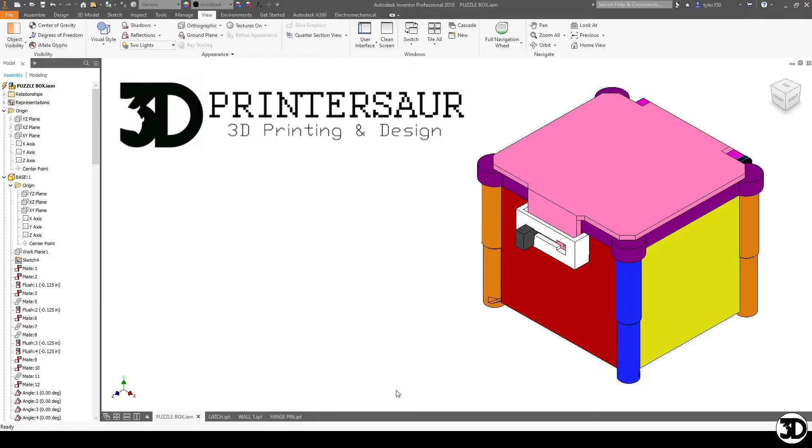In this video we're going to show a couple more pieces that are just to be polishing up here, and that'll be it for this. The next video will just show you how all the components are put together, and then we'll continue from there.

So in this portion here we did two different small changes. So one is with this latch portion. One, I actually did make it flush. I just changed my mind. And the other thing is that I changed it so that this piece here, the latch itself, will actually fit into the wall so that it actually holds on to something.

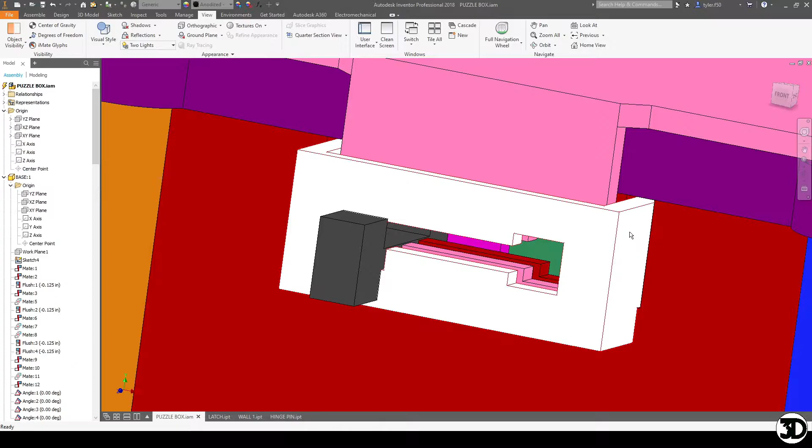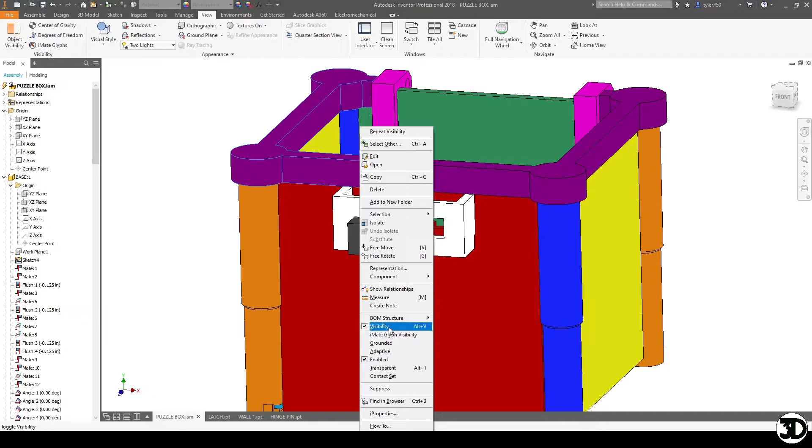The other thing I did is I added a pin, and this pin is going to allow for the hinge to actually move but be held in place. So let's take a look at the latch portion first on how it's designed and then kind of go from there. So first thing you'll notice with this is that the latch itself is actually just a simple groove that

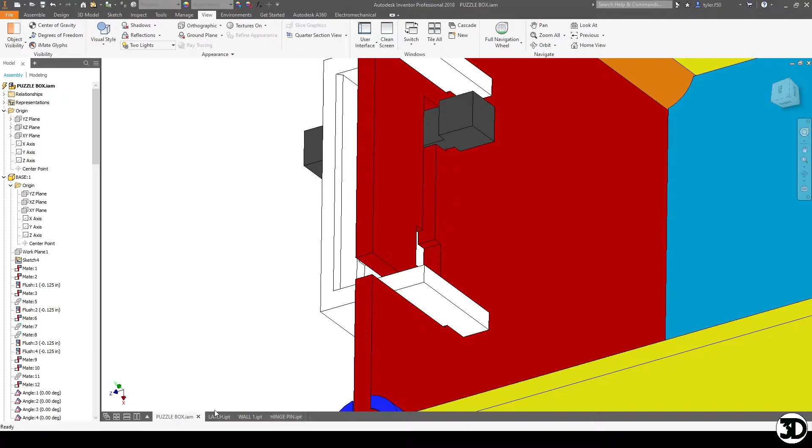is put in place. It slides down on the wall, and then essentially what happens is that lip that goes around will just cover it so it can't go up. And this is just done by some simple grooves on both the wall itself and the latch. So let's take a look at the latch and see how that is designed.

So here we have the latch, and you can see that essentially it has a little groove on it that's going to grab onto the wall, and essentially it is the same on both sides. So the way that that is designed is it essentially is 3/16 of a height up. It is 1/8 of an inch plus 1/64 of an inch wide, as the wall is 1/8 of an inch, just to give it a little bit extra gap.

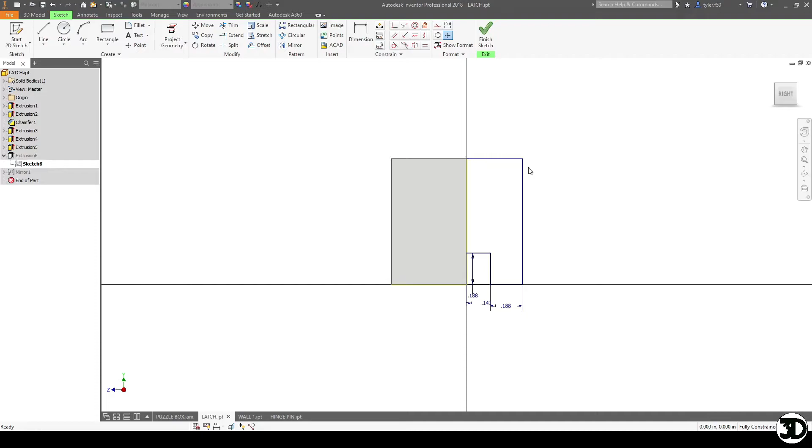And then it's also another 3/16 wide for the piece that needs material on the outside to create that groove. Everything else is the same dimensions height-wise and length-wise for the piece, for wall thickness, sorry. And then that's essentially how this is made, and then I just mirrored it to the other side to reduce the design time. So that's how this is designed here.

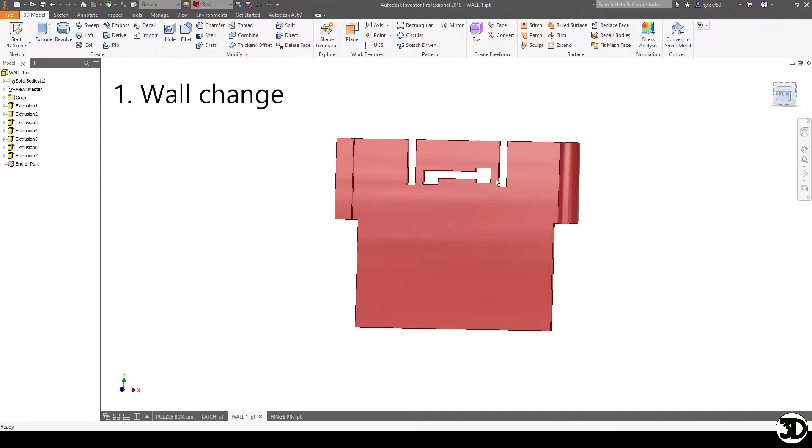And if we take a look at the wall real quick, you'll see that the wall itself just has a simple groove that goes straight down beside the locking components. And the way that this was figured out was essentially measuring from the bottom of this here to the top of the wall, and then subtracting 3/16.

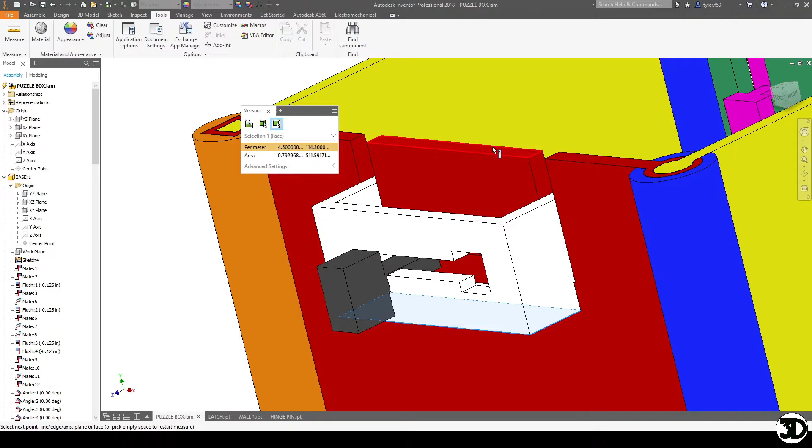So if I were to measure this here, you'd see that from here to here, it's 1 1/32, give or take. And if we look at this component here, it is 1 1/32 minus 3/16. And that allows us to have the component to match up there.

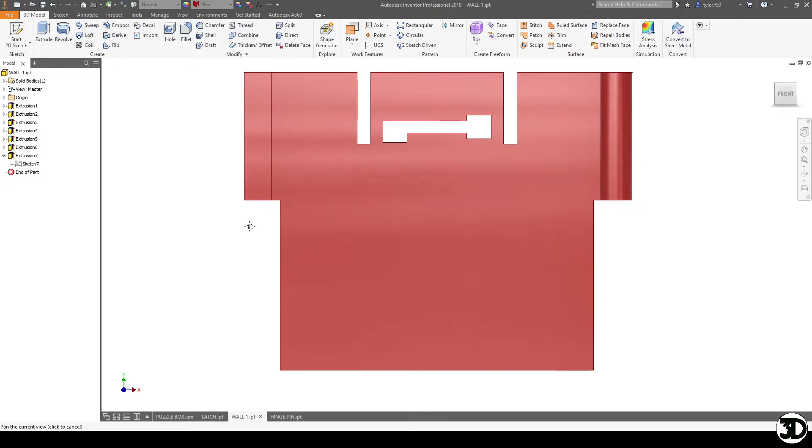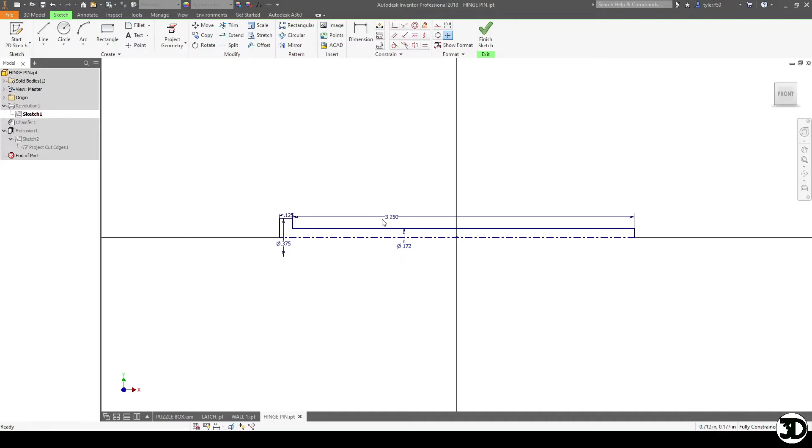Next, we're going to take a look at the hinge pin and see how that's designed. So here you can see the hinge pin itself. It's a very simple design. Essentially what I did is I measured the diameter, and it was 0.1875 or 3/16. I subtracted 1/64 to give a little bit of a gap, and then I made it 3 1/4 inch length, and that's because the distance from here to here is roughly 3 1/8 inches in length.

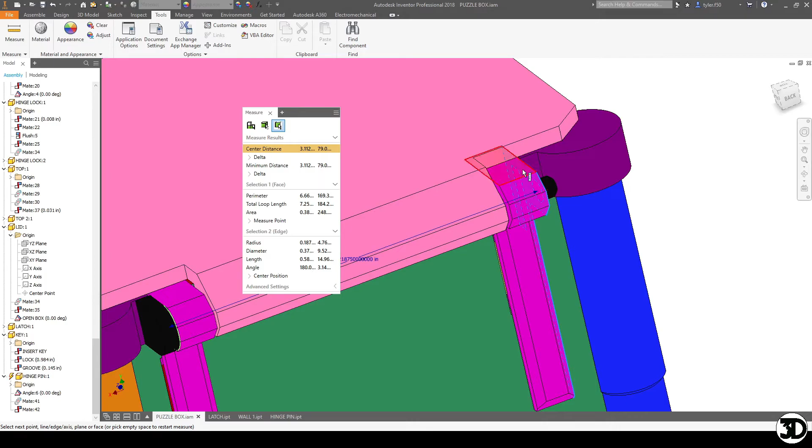So 3.112, I want to make sure the material would stick out or protrude enough from the side so that it still has contact with the pin in the hinge. Another reason why I made it extra long is if this shifted over at all, there's still enough material for it to be in full contact, so that when the hinge opens and closes the lid, you'll still have contact on both sides so it can properly spin. There's no potential for binding, basically.

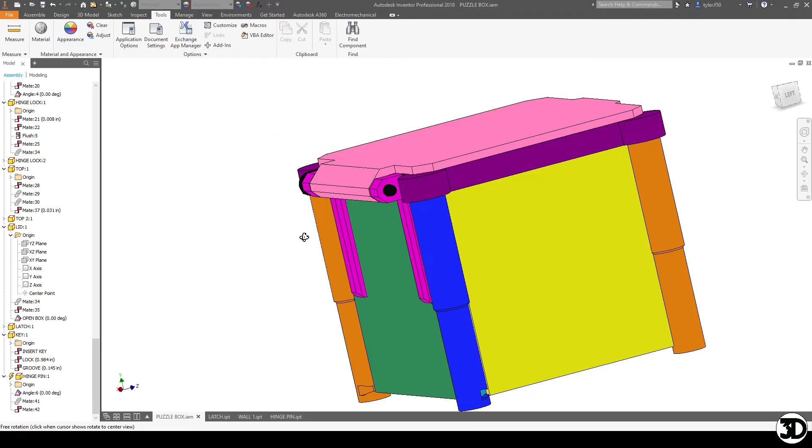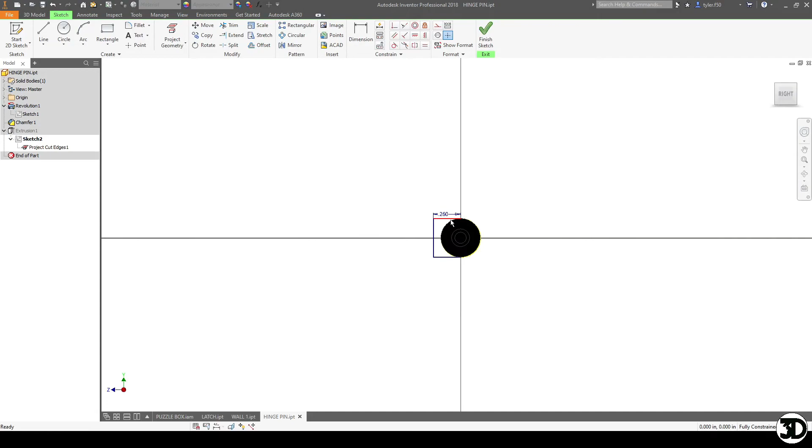The next thing I did is I measured from the center to the face, and you'll see that it's just a little over 0.25. So I'll actually bring this out a little bit, 0.255. And what I did for the design portion, if you look here, is I made that 3/8 of an inch diameter, but then from the center to the outside face, it is 0.25 inches. So I have about 5 thou gap.

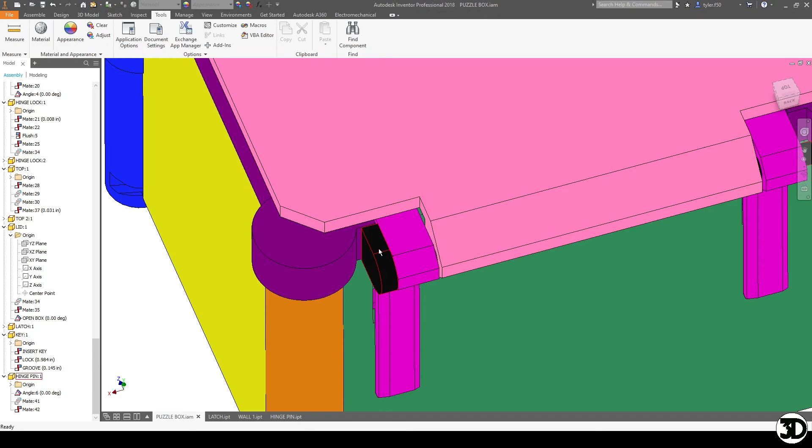But considering that there is a little bit of movement in the hinge to the hole, that's actually not too bad. And the reason why I made this little piece is essentially it can't spin out. Also, it'll stop against this radius that we have here, and that will prevent the hinge from popping out. So that was one reason why I decided to design it like that. So those are the components that I designed or changed for the last couple things for this puzzle box.